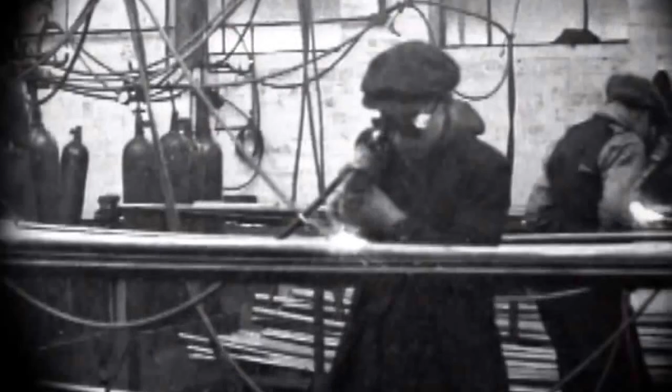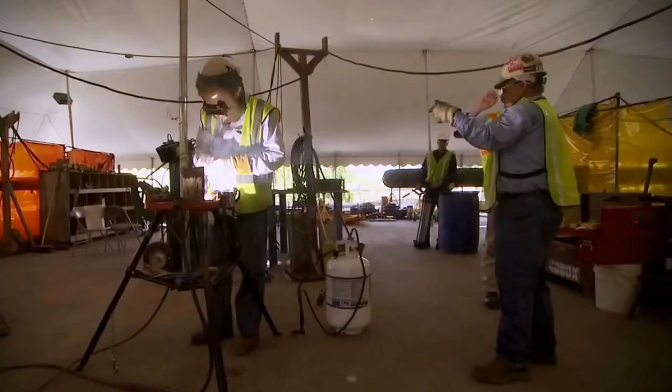Since the 1930s, when gas and electric arc welding became the method for pipe joining, a mechanical contractor's profitability has been determined mainly by the quality of that welding, its safety record, and how well it adheres to the codes and state regulations that apply.

So, as a contractor, where can you find the tools that will help ensure that your company's piping installations meet or even exceed those codes and state regulations and reduce your liability risks? The answer is the National Certified Pipe Welding Bureau, or NCPWB, a subsidiary of the Mechanical Contractors Association of America.

It all comes down to 4 terms I'm sure you've seen in contract documents: welding procedure specifications, brazing procedure specifications, certified welders, and certified brazers. All 4 have implications for your company, especially when it comes to code compliance.

So what are welding procedure specifications and brazing procedure specifications? They describe the process and techniques that your company must follow to ensure that any weld meets or exceeds all the requirements of a specific code or specification. And what are certified welders and certified brazers? They are individuals who your company certifies as qualified to perform a specific type of welding or brazing.

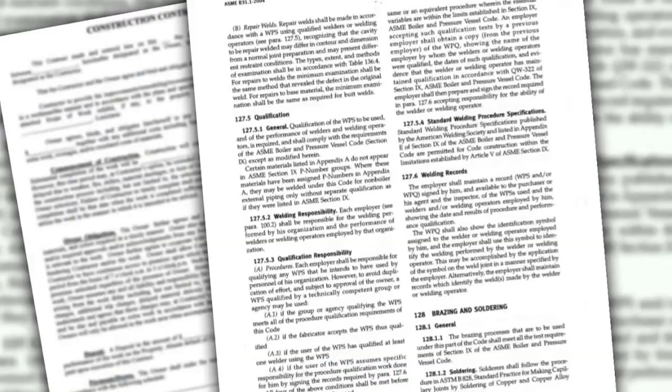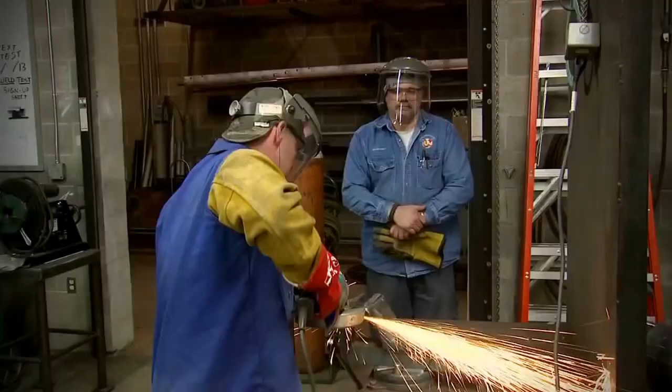The contract documents for jobs performed to ASME B31 codes require that the mechanical contractor certify all welders and brazers working on the job. Some federal and state regulations also mandate the use of qualified procedures and qualified welders on certain piping system installations, such as those in power, petrochemical plants, and even hospitals and office buildings. As contractors, you have a responsibility to meet piping codes when installing piping systems.

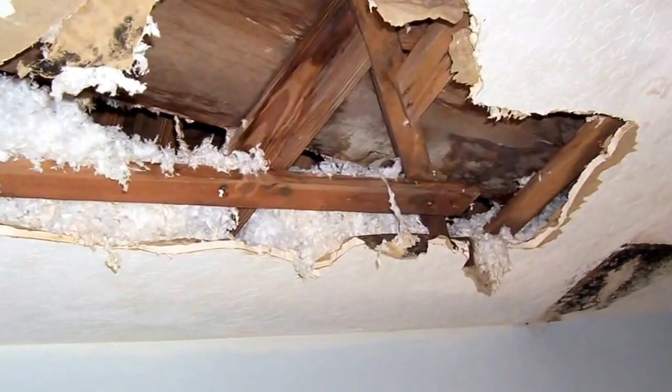But what happens if your installed piping system fails? What's next? And what will it end up costing you? Well, the cost of repairing your company's own work is a given, but that's just for starters. Think about the price to replace the work of others, like drywall, carpentry, painting, and carpeting, just to name a few. And your company's reputation could suffer. You might even lose your business.

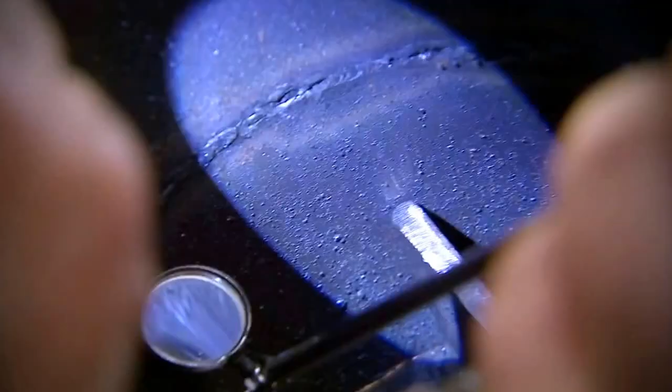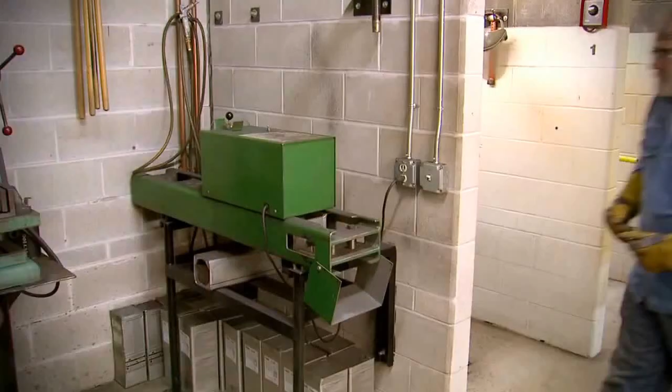Why take that risk? Even if you've spent the time to develop your own system, are you absolutely sure that the system is fail-proof? Can you really afford to find out? As a contractor, you know that developing your own welding procedure specifications is complex and can be frustrating. It's trial and error, where specimens from a test weld have to be evaluated for their tensile strength and ductility. If the specimens fail to meet strength or ductility requirements, you have to tweak the procedure and weld and test another coupon until the results are up to code.

But you can avoid going through the frustration of having your welders qualify for each and every type of weld or braze your company makes on a job. There is an easier option. All B31 codes for pressure piping allow members of a competent group or agency to use welding and brazing procedure specs that have been developed by that group or agency. So where do you find such a competent group or agency?

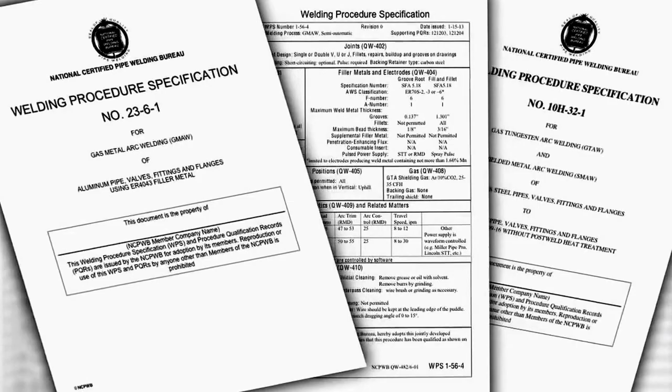Look no further than the NCPWB, an organization of contractors who have come together to jointly develop welding and brazing procedure specifications that comply with the ASME B31 codes. The NCPWB was established in 1944 and provides its members with more than 100 pre-qualified welding procedure specifications for all types of piping materials. The Bureau also provides members with 4 pre-qualified brazing procedure specifications covering copper alloys and copper to carbon steel.

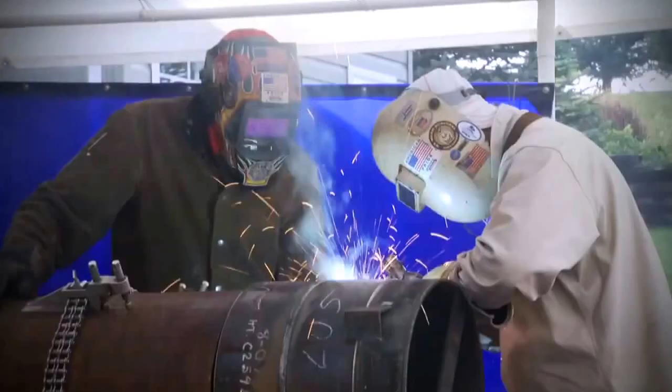As a member of the NCPWB, you'll be able to adopt these procedures, saving the time, cost, and frustration associated with qualifying your own procedures. Once you join NCPWB and adopt its procedures, the next step is to qualify your welders and brazers.

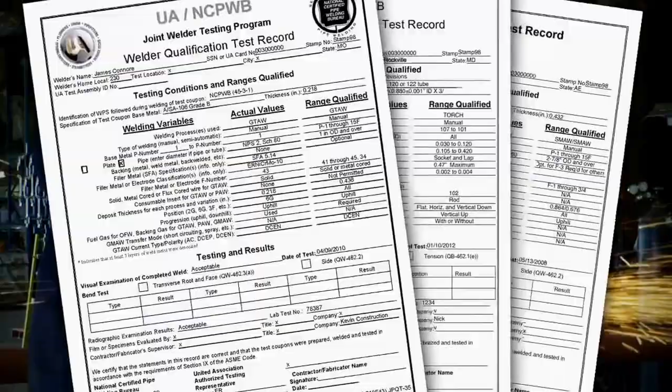Simply hiring competent welders who have passed the rigorous UA weld tests from your local union hall is not enough. Those workers' welding or brazing qualification records must match your company's qualified welding and brazing procedures. If they don't, then you are not in compliance with the requirements of the ASME B31 code.

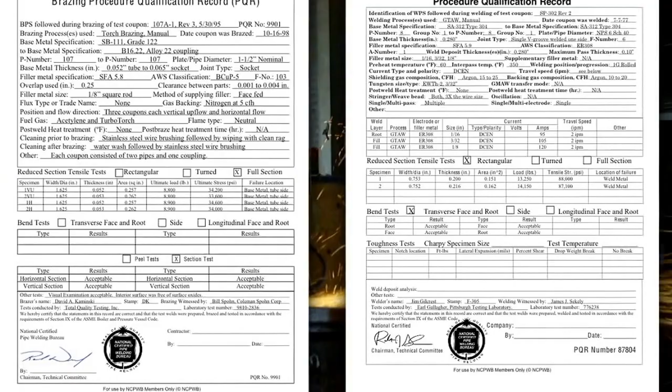It can be extremely costly to re-qualify your welders for every job, but contractors needlessly do it again and again. You can avoid this expense by taking advantage of something called interchange of welders' records.

Under the ASME B31 piping codes, welder qualification test records may be interchanged among contractors who use the same welding and brazing procedure specifications. This means that an NCPWB member company that uses the Bureau's welding and brazing procedure specifications can use welders and brazers who have been qualified by any other NCPWB member contractor without requalifying them.

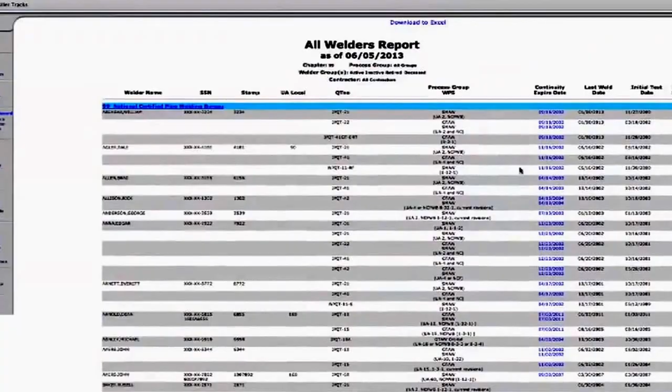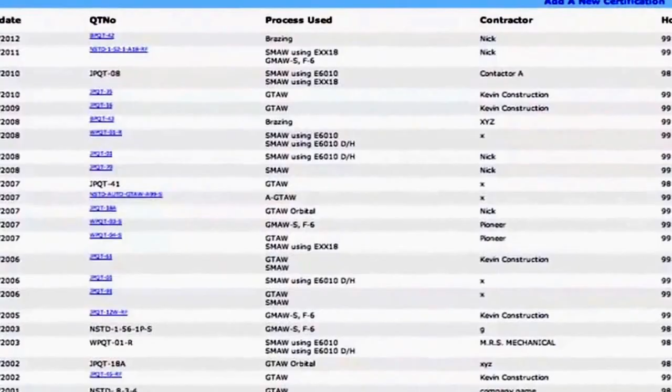Imagine the savings! To assist with the interchange and record keeping, the NCPWB has a national welder database with information on thousands of welders, including each welder's name, qualification date, location, and the processes for which the welder is qualified. The database also includes the welder's continuity records, or records of each welding process used every 6 months as required by the ASME B31 codes.

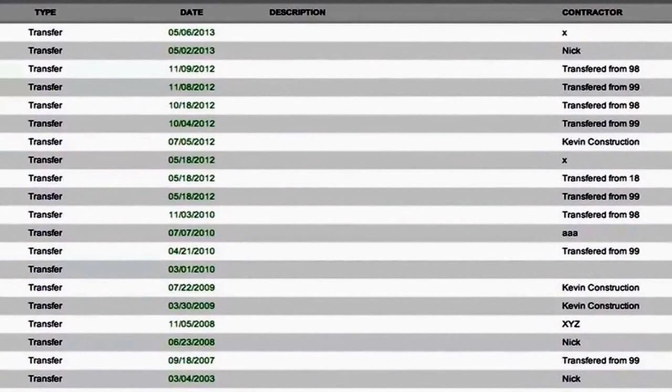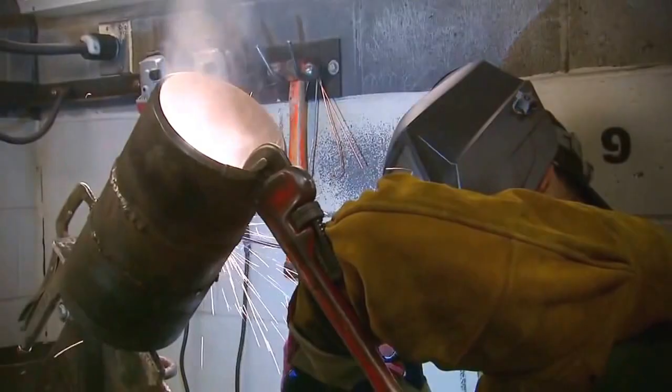If a welder has not used a process for longer than 6 months, his qualification expires and the welder must be retested for that weld. In addition, the database makes it easy for NCPWB chapters to exchange welders' records among NCPWB member contractors nationwide. That means you can find a qualified welder and put him or her to work almost immediately, without time-consuming and costly requalification.

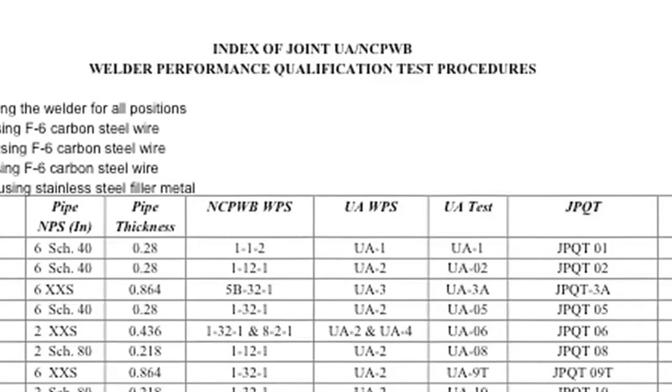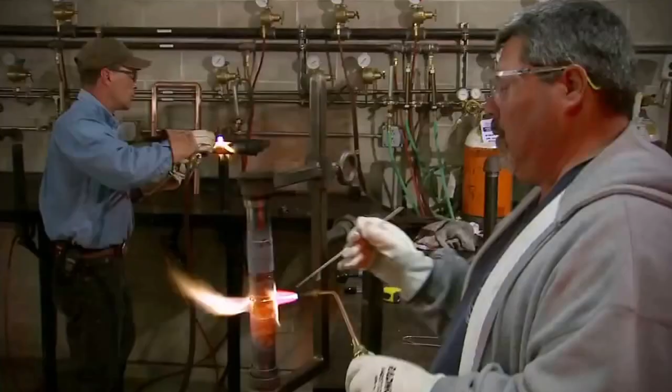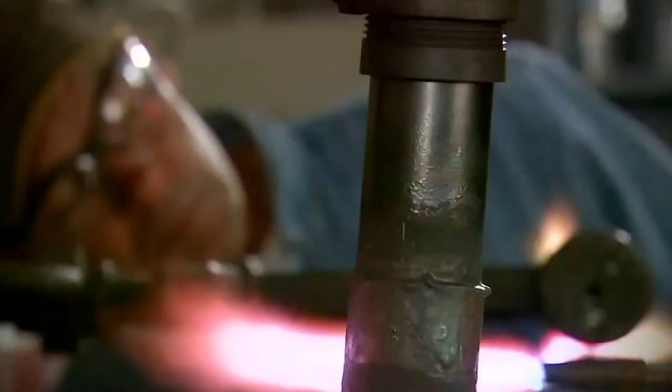What's more, since 1997, the NCPWB has partnered with the United Association of Plumbers, Fitters, Welders, and Service Technicians, or UA, to offer a single uniform welder certification program for the mechanical piping industry. The UA weld test procedures and the NCPWB production welding and brazing procedures complement each other and have been developed jointly to comply with piping code regulations. You can't use a test procedure without its matching welding or brazing procedure specification.

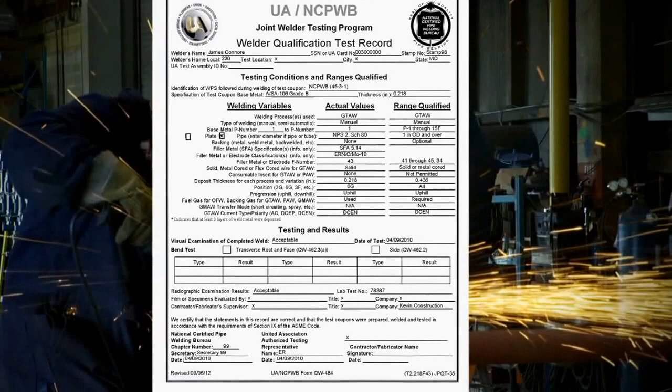Many joint performance qualification tests, or JPQT records, have been developed to save contractors the time they might otherwise spend matching a test procedure to the appropriate welding or brazing procedure specification. The joint program is designed to meet the growing need for experienced, high-quality welders. It addresses the facility owners' and managers' welding needs, as well as those of the union contractors who do the building, the renovation, and the maintenance.

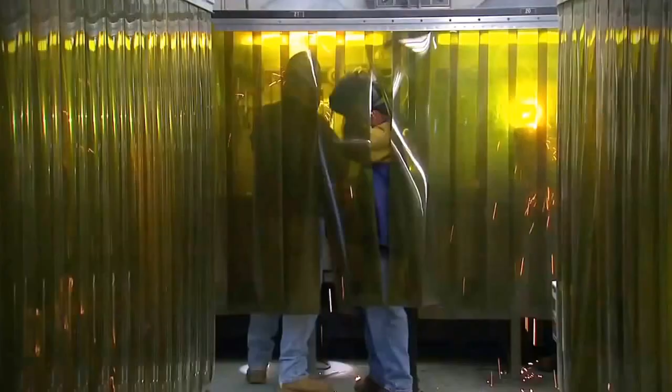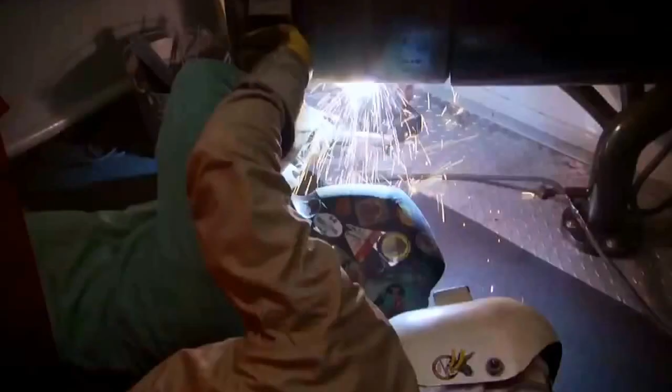The Joint UA NCPWB Welder Certification Program gives NCPWB member contractors a competitive edge by eliminating costly repetitive testing, while making it easier to acquire skilled and qualified UA welders. NCPWB membership provides a wealth of technical and practical information on how to comply with piping codes. It gives you access to experienced contractors who can answer your code questions. In many cases, they actually represent the NCPWB and MCAA on the code bodies.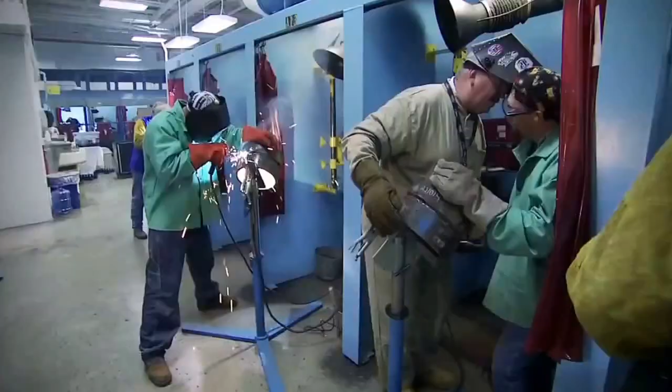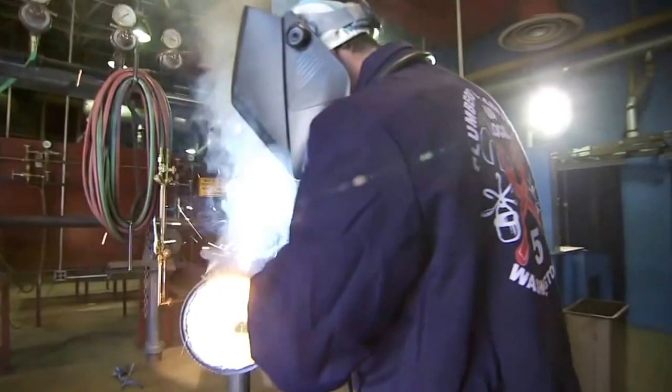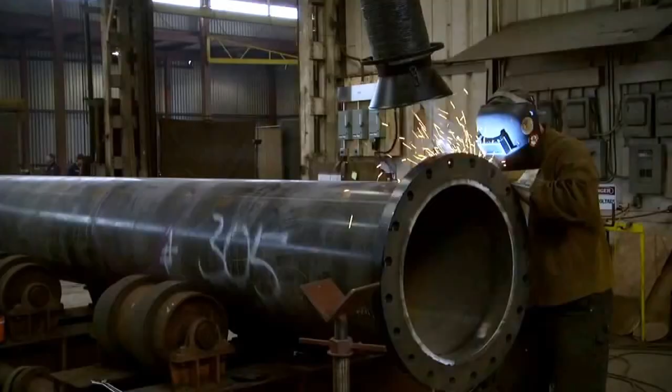It helps you accept UA-trained welders into your welding program, and it opens the door to expert and technical advice from the NCPWB National Consultant. NCPWB membership provides an economical alternative to developing your own procedures and continuing to needlessly requalify welders. The cost of being an NCPWB member is less than the cost of qualifying one welder. And NCPWB membership saves you aggravation and time, while reducing the liability risk involved with welding and brazing procedures and welder qualification.

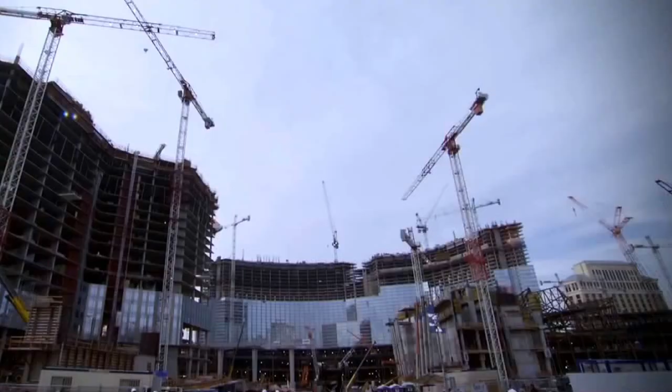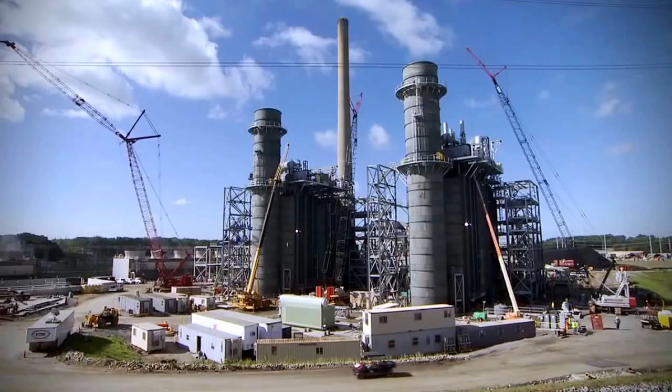Remember, whether to join the NCPWB is a business decision to be made with profit in mind. While you may not like the codes you have to deal with, you comply because it's good business and promotes profit by minimizing potential liability. In the same way, membership in the NCPWB promotes profit by eliminating repetition and enabling you to get the right welder on the job right away.